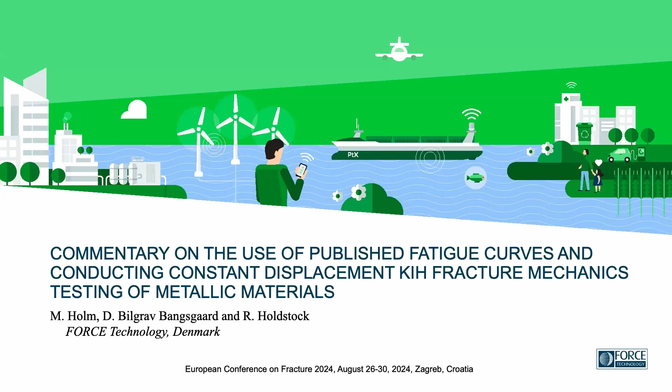My name is Holm, and I work at a company in Denmark called Force Technology. Shortly, we are a research and technological organization, which means that we are independent and self-governing. We provide services to the international market.

What I'm going to talk about today is testing in a hydrogen environment, and also the fracture mechanics, specifically for pipelines. In our company, we have hydrogen services within materials and welding, testing, fracture mechanics, flow and metrology, emissions measurements, and on-site inspection.

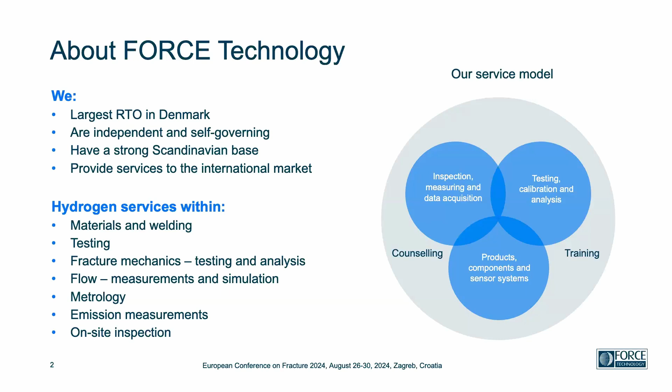So the agenda is to start with the background for why I'm here and what we are working with. I'm going to talk about fracture mechanics testing in hydrogen, fatigue crack growth in hydrogen, and also what the standards are saying and how we apply it in the fracture mechanics assessment, and then finally the conclusions.

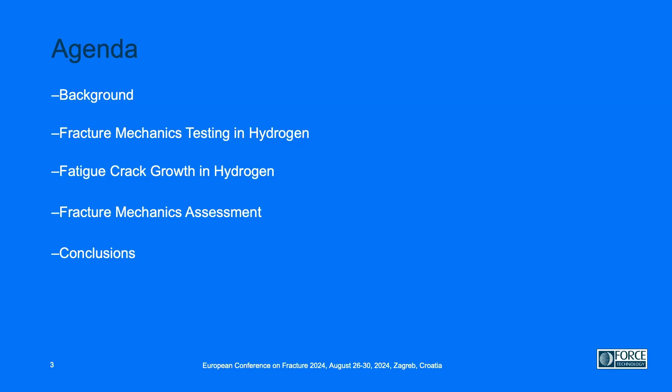So the background is, a couple of years ago, the hydrogen infrastructure in Denmark needed to be compliant for hydrogen service, and that means that we needed to install new pipelines, and some companies wanted to convert old gas pipelines for hydrogen service. At that time, the most referenced standard, at least in the industry that we talk with, was the ASME B31.12.

In these projects, we have been involved in the risk assessment, metallurgical counseling, testing and qualification of materials for hydrogen service, that's permeation tests, and fracture mechanics testing, which we have just started up. And then also the fracture mechanics assessment to determine critical flaw sizes, lifetime, inspection intervals, and all this.

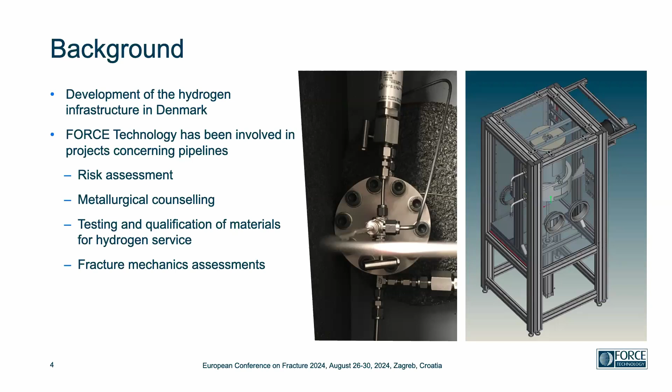So back when we started our involvement in the hydrogen industry, as we are an RTO that needs to deliver service to the industry, we decided that we needed some test facilities for testing in hydrogen.

There are several ways of testing; the first one I'll talk about is the stress intensity threshold factor, which can be tested with a constant displacement or constant load test. The equipment we have can be pressurized up to 500 bars, and the temperature is between -20 and 200 degrees Celsius.

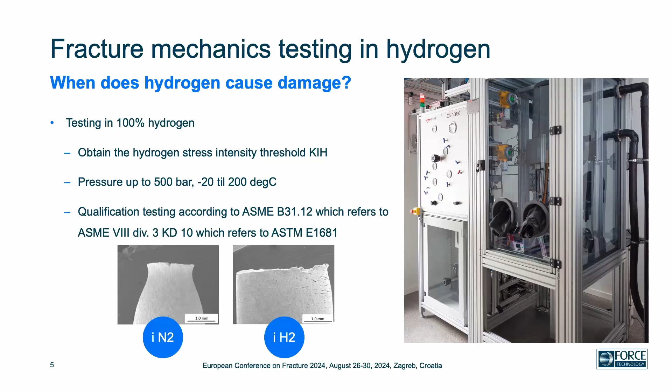This test method is the qualification testing according to ASME B31.12, which is the hydrogen pipeline standard in the ASME code. The testing refers to the ASME Boiler and Pressure Vessel Code, Division 3 KD-10, which then refers to the test method in ASTM E1681. One of the test methods in ASTM E1681 is the bolt-loaded CT specimen to obtain the stress intensity threshold factor K1H.

The test procedure, in short, is that a fatigue pre-crack is conducted in an in-air environment. The specimen is then inserted into a glove box, which is an inert environment with strict requirements on the levels of oxygen and H2O. The bolt is preloaded with a clip gauge to know the crack mouth opening displacement.

The specimens are then inserted into the autoclave. The KD-10 in ASME VIII defines 1,000 hours for carbon steel. And one of the pros of this test method is that several test specimens can be tested at the same time.

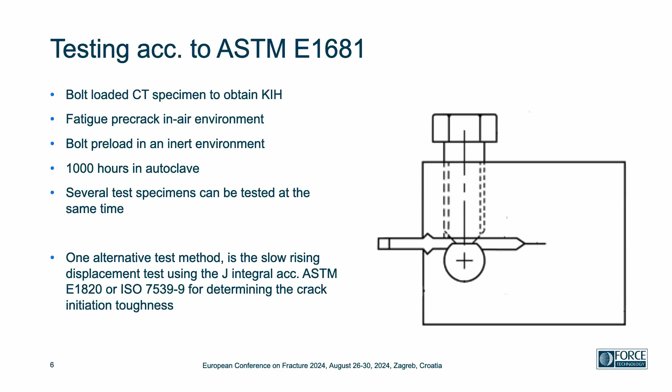One of the alternative test methods that we have also been discussing recently is the slow rising displacement test using the J integral according to ASTM E1820 or ISO 7539-9 for determining the crack initiation toughness.

When we are looking at these two methods, as I said before, one of the pros of the compact bolt-loaded test specimens is that you can test several specimens at once. It's quite cheap compared to the slow rising displacement, where you can only test one specimen at a time. It is the test method referenced in ASME B31.12 and all the way through the other standards.

And one paragraph in Division 3 KD-10 says that the results may even be used if plane strain conditions are not present, but we'll come back to that. That's as long as the test specimen is at least 85% of the final thickness of the pipeline.

The con is that it's based on linear elastic fracture mechanics, which requires plane strain conditions, which may be difficult to obtain in relatively thin pipelines. Research has also shown that K1H testing gives non-conservative results compared to the hydrogen crack initiation toughness for lower strength pipeline steels.

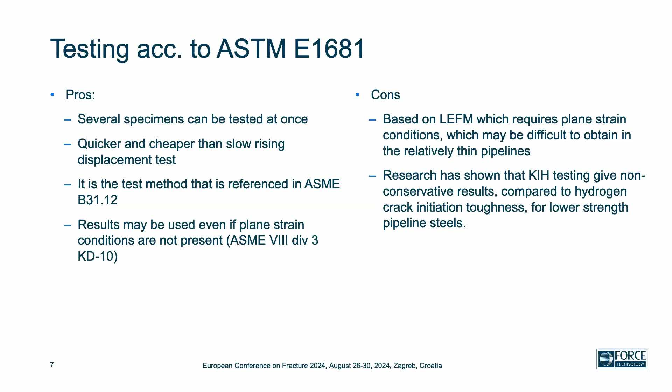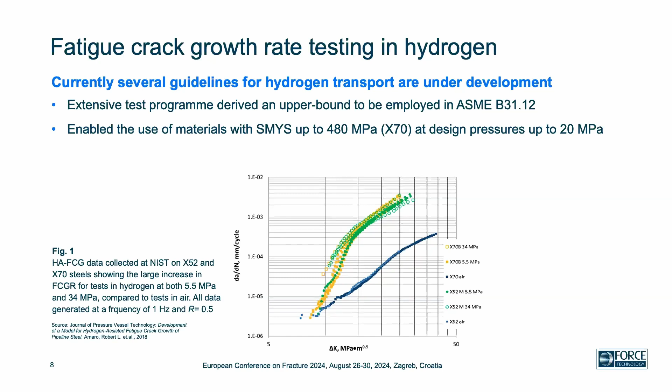But another problem is the R ratio is for less than a half. So this might give some problems when you are assessing welds, or if the pressure fluctuations are less than half the operating pressure, because then the R ratio is above 0.5, and this curve is actually not applicable.

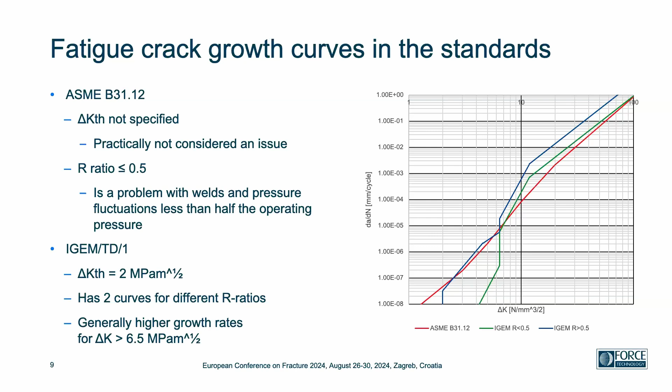So in our work with the pipeline industry, we have also conducted fracture mechanics assessments. We have done this according to the British standard BS 7910, as this is one of the two standards that I know are used for applied fracture mechanics, the other being API 579. To do these assessments, we of course need the dimensions of the pipelines, including the weld orientation, and this weld orientation actually gives some complications in the case of a spiral welded pipe.

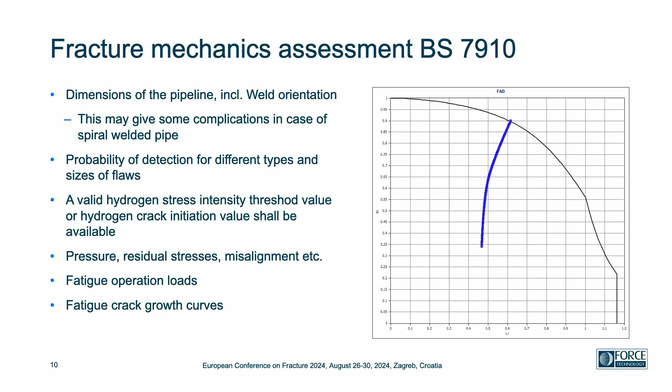We need to know the probability of detection for different types and sizes of flaws. A valid hydrogen stress intensity threshold value or hydrogen crack initiation value shall be available. We need to know the pressure, the residual stresses, misalignment, and so on, fatigue operation loads, and the fatigue crack growth rates. And then we can determine the fatigue crack growth according to the failure assessment diagram. When it reaches the curve, then we reach an unsafe or a critical crack size.

Talking about the spiral welded pipe. In BS 7910, it's stated that if the angle is below 20 degrees from the principal plane, then you can use a projection of the weld flaw to either of the two principal directions. If the angle is above 20 degrees, then shear stress may have an effect on the results.

And then it recommends you go to Annex A, which shows how you can combine different fracture modes, fracture mode 1, 2, and 3. The problem is that the standard does not have any standard stress intensity factor solution for mode 2 fracture. So in that case, we need to look elsewhere, either with finite element analysis or at some of the comprehensive stress intensity factor solutions that are available in the literature.

For this spiral welded pipe, we are actually in the dialogue of starting a full-scale test. It could be quite interesting to fabricate it with some prefabricated flaws in and just start to test it with a fluctuating load to see when it will actually go through the pipe.

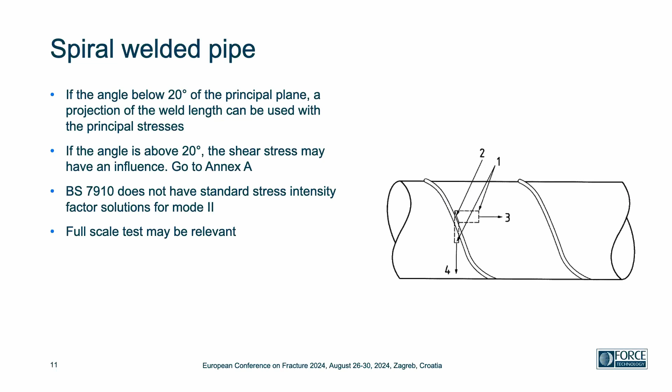Conclusions. First of all, the current standards are not without issues. I know that a lot of standards within the hydrogen industry are in development, so I'm still waiting to see how they apply the fracture mechanics in the new standards that are coming. The hydrogen stress intensity threshold value K1H can be obtained, but research has shown that it may be a non-conservative value compared to the crack initiation toughness. And as I mentioned earlier, the boiler pressure vessel code allows for the K1H even if plane strain conditions are not present.

There's a difference between the fatigue crack curves, and I would think the ASME code needs to implement something that goes for an R ratio above 0.5. And the BS 7910 does not have stress intensity factor solutions for the mode 2 fracture. However, there are methods for evaluating combinations of several fracture modes in the analysis.